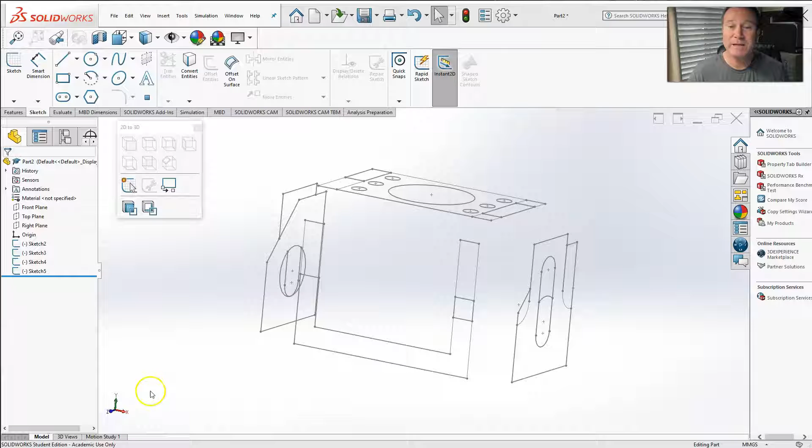Hello again. Here's part 3 of DWG from 2D to 3D. We have our sketches, orthogonal sketches, on the right side, left side, front side, top.

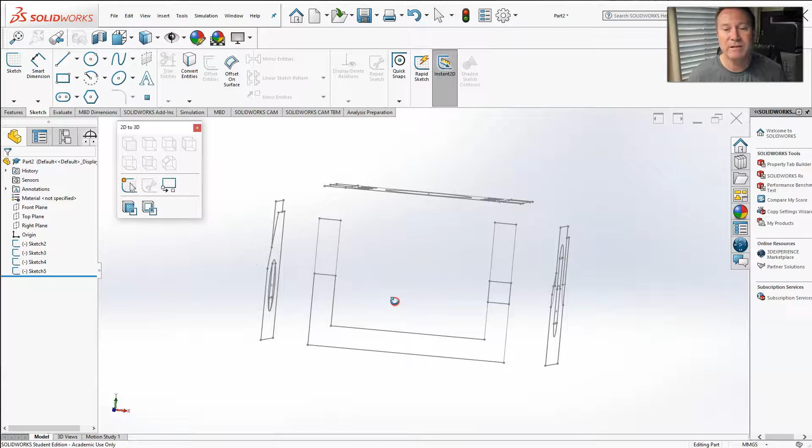Now, I'm going to go a little bit out of the order that I did in the pages that you read above. I'm going to first extrude this so when I clean up the right and left sketches, it makes it a little more clear what I'm doing. So, in order to extrude using the 2D to 3D function, you have to select the drawing first.

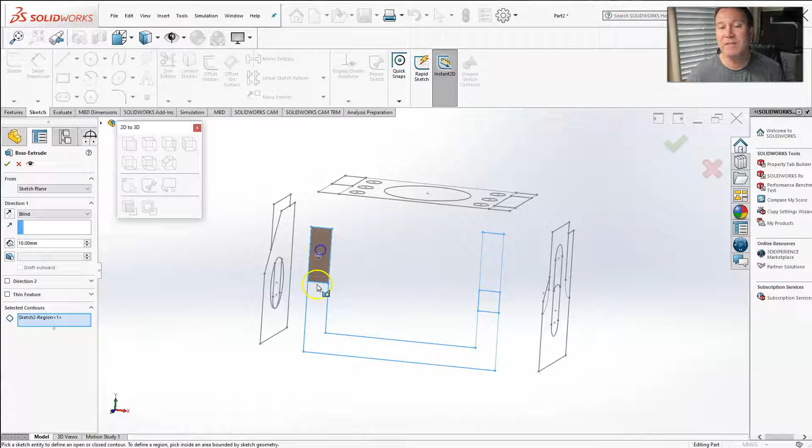So, the easiest thing I found is just go in your tree over here and select; here sketch 2 is our front. Go for the convert to extrusion, hit that, and it makes it simple. All we gotta do is left click inside the closed areas, and that gives us our extrusion.

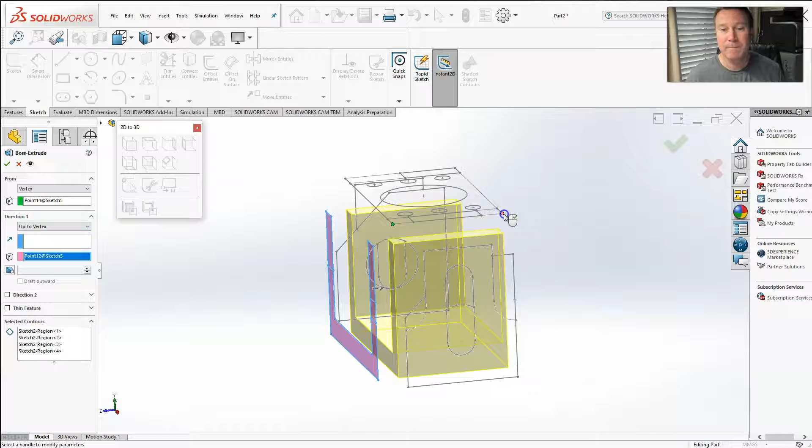But now the trick is, I don't want to extrude straight off this plane. I want to extrude from here to here. So you can go from vertex, I'll pick this vertex, to, let's say, up to the next vertex. And there we have a U-channel. Select OK.

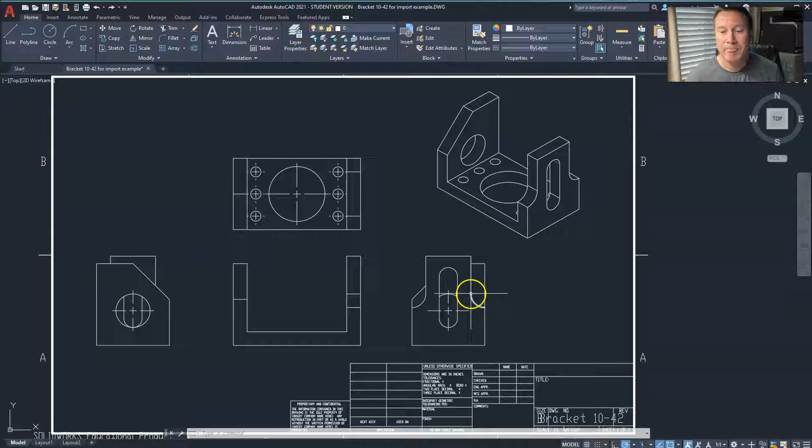Now, see how when I clean up these sketches, I want to clean up the right side. The components of the right, if you remember from here, just have these two little cutouts and the slot. So the slot is correct, and these two cutouts, this line work here and this line work and this arc are components of the left side. I don't need that in the right side. I just want to clean it up.

So if I highlight Edit Sketch, I just want to get rid of the components that I'm not going to use. Nope, missing that one right here. Delete. Now, I'm just going to exit real quick, save this.

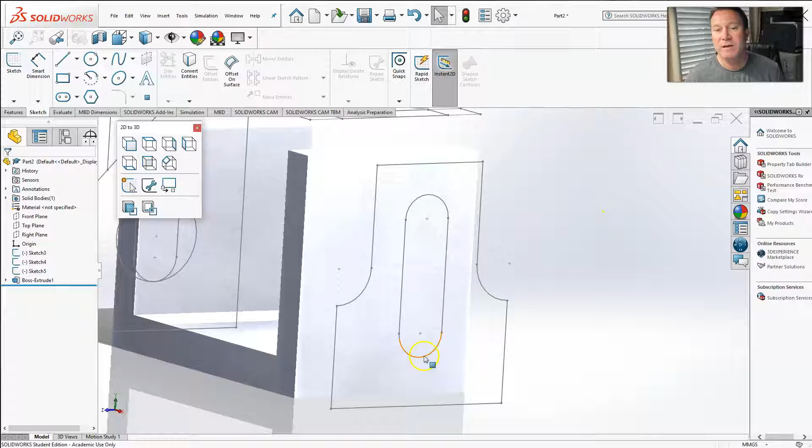But what I want to do is cut this portion out and this portion out and the slot. So I'm going to have to add into this sketch the upper portion here, because the extrude cut function is similar to the convert to extrusion. The extrude cut or convert to cut is you select areas within enclosed areas and that will cut out.

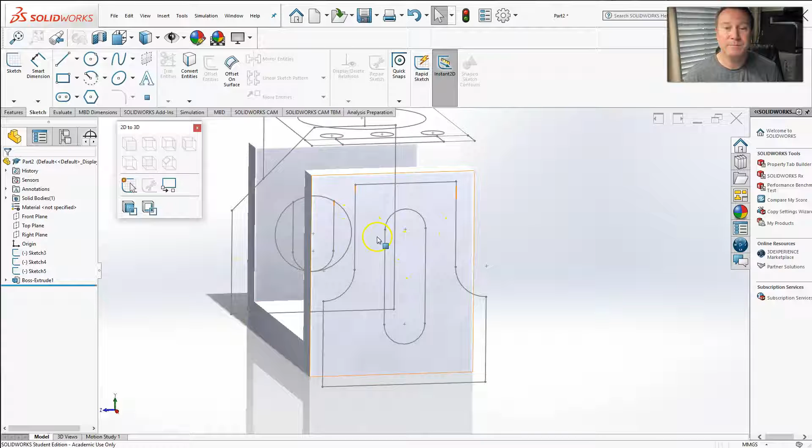So let me go back and open this sketch again. And this will make sense once we do our first cut. Go up to the top, straight up, over, down. Now I've got two enclosed spots. Let's do the right side first. Select the right sketch, extrude cut.

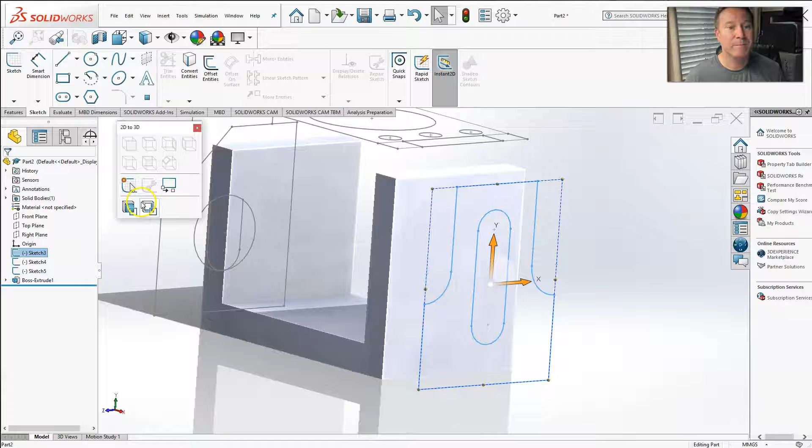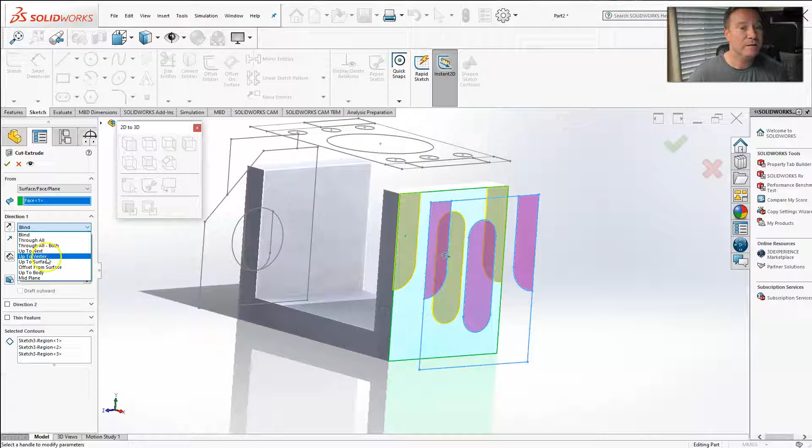Now it opens up the same way. I want to click here, here, and here. But unlike the previous front where we used the actual drawings, we could use the top view for this, but I have a physical U-channel here. So I can actually select a surface, let's say from this surface, and go up to next. Now we've created the right side.

Let's do the same for the left side, the left sketch. I want to clean this up. So I'll select the sketch, edit, get rid of the components I do not need. Technically, I don't have to get rid of these because I can always just ignore them, but I like to clean them up.

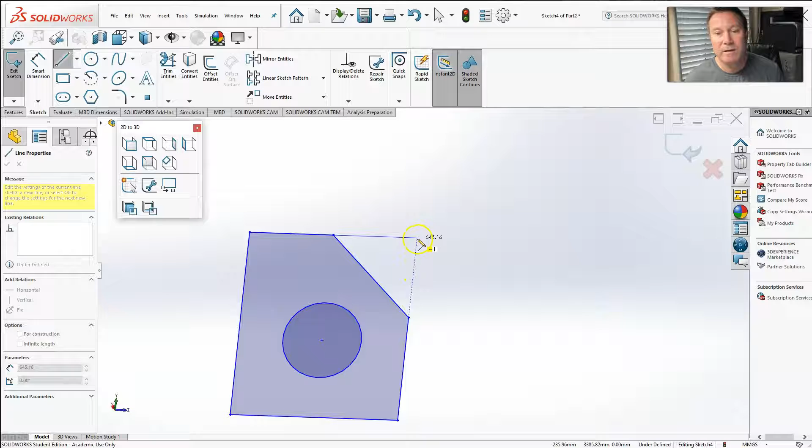And if you haven't noticed, we don't have any dimensions. When we're editing the sketch, we could add in dimensions. Let's say you are making the solid model version of this part, and you maybe want to modify components of it. Well, as you're doing these sketches, you could fully constrain the sketch by adding in all the necessary dimensions and then change them in the future as needed.

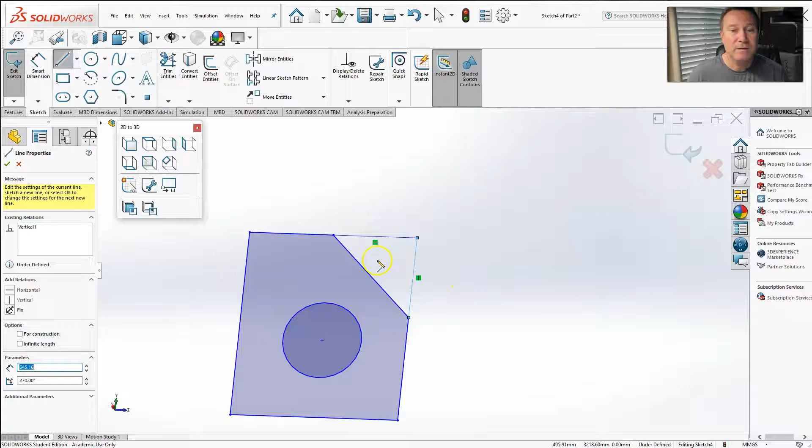But for our purpose, we're just taking a part that is from a DWG and converting it directly into a part model. So now I've got a part. I'm going to extrude cut here, extrude cut here. That sketch is looking good now.

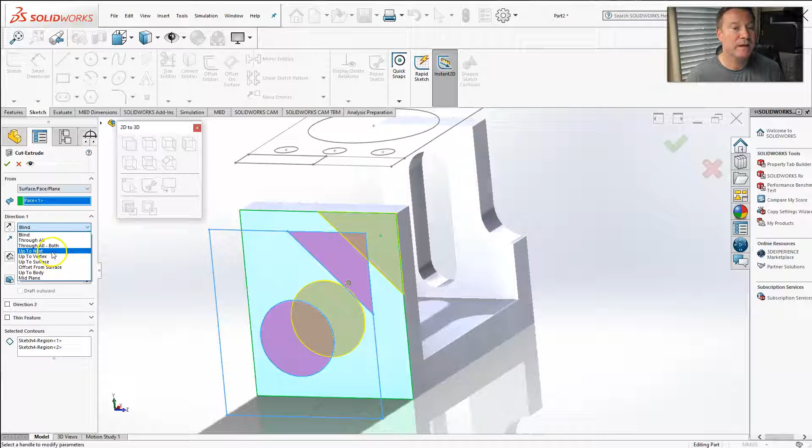Highlight the sketch, go to your extrude, convert to cut, and then pick the areas inside that you want to cut. And similar to the right side, we can use the surface and up to next. Now the left side is done.

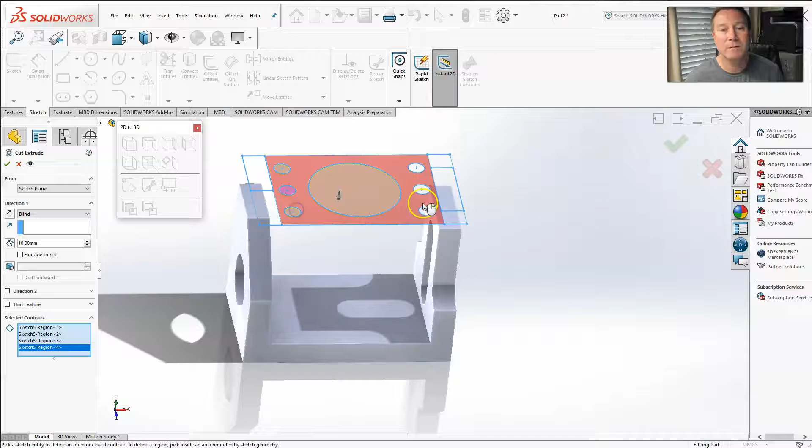Now the top, I don't have to do any cleaning up because the only thing I'm going to use the top for is cutting these circles in the base. So, highlight sketch 5, with the convert to cut. Now I just have to select the internal portions. And similar to the right and left, I can just pick a surface and up to next. And here we go. We have our part.

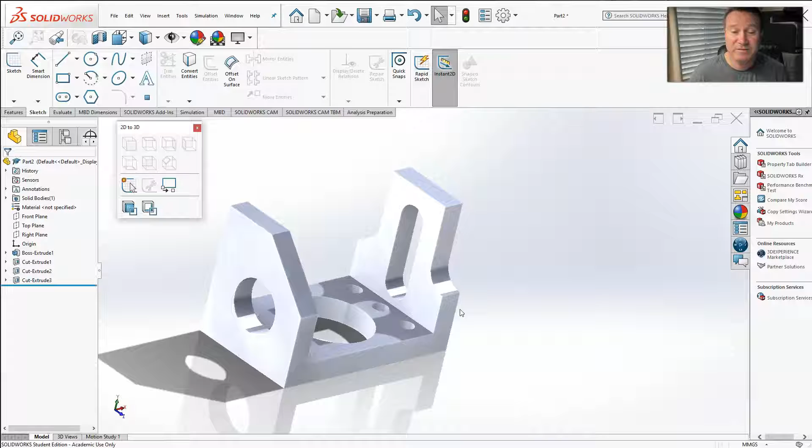Now this 2D to 3D toolbar is pretty handy when you have two-dimensional drawings from DWGs or DXFs. It's a tongue twister there.

And it's pretty fast, actually. So I'm going to show you another route in another video. This was basically 1 extrusion and 3 cuts. I'm going to do the opposite: 3 extrusions, 1, 2, and 3, and then 1 cut, just to show you a different way. There's always more than one way to create your part file.